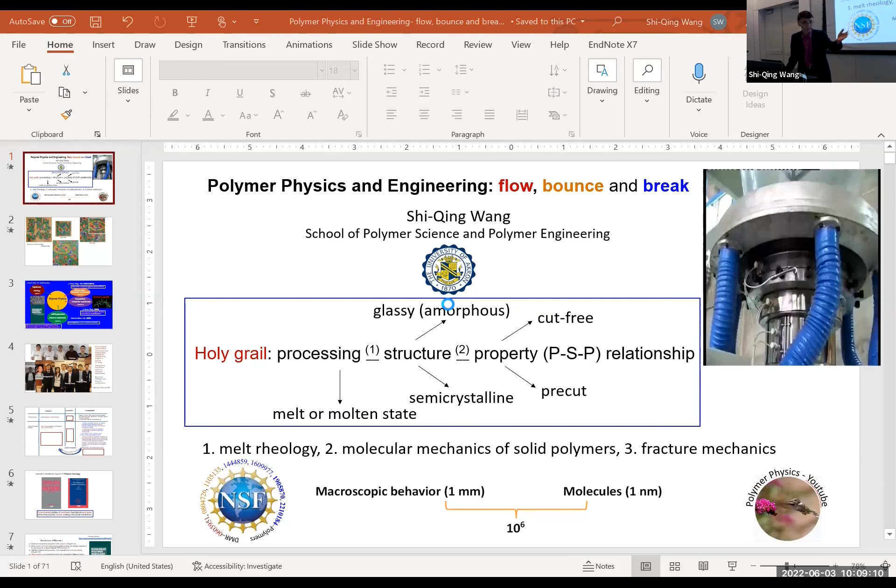Okay, now it works. So there's a melt state—you need to process it, and depending on how you cool it, depending on the material, it may be glassy or semi-crystalline. The processing can affect the structure, so if you can improve the structure, you may have a chance to develop better properties. But property is the most difficult because that's the effect you're seeing—you don't know what is the cause. You have to trace back in this inverse problem across six orders of magnitude.

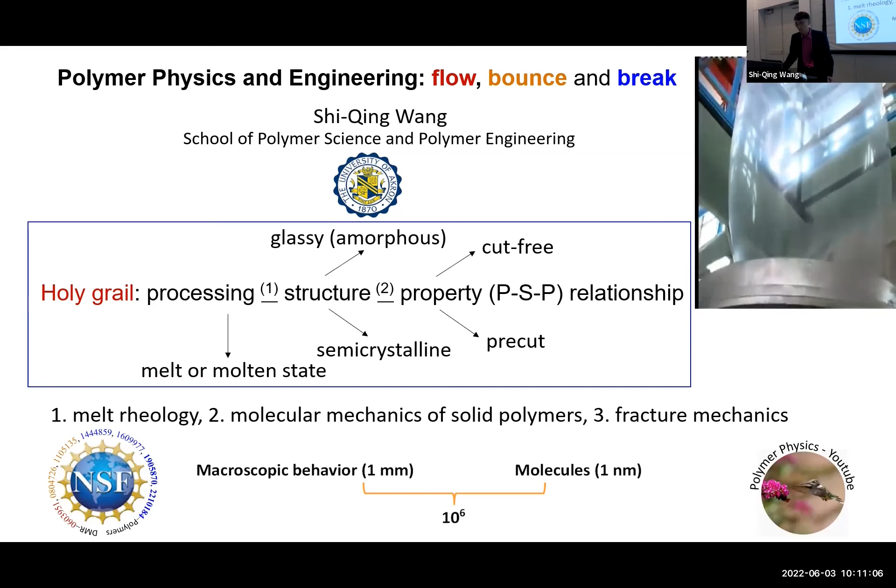I'm proud to tell you that we've been continuously supported by NSF for the last 18 years or so, and we're excited to embark on the last episode. So I'm sharing with you a story in three episodes. In any case, we do science like this.

We have a puzzle—you guys probably have it. It could consume you a whole afternoon and you won't be able to solve it, because when you put up the rest of the pieces, you find it's mismatched. It's not right. But my wife told me there is a solution, and the solution is different: these two butterflies are facing each other instead of facing the same way. What does this tell you? Don't be a frog looking into the sky—you have a very limited view, and that view can be entirely wrong.

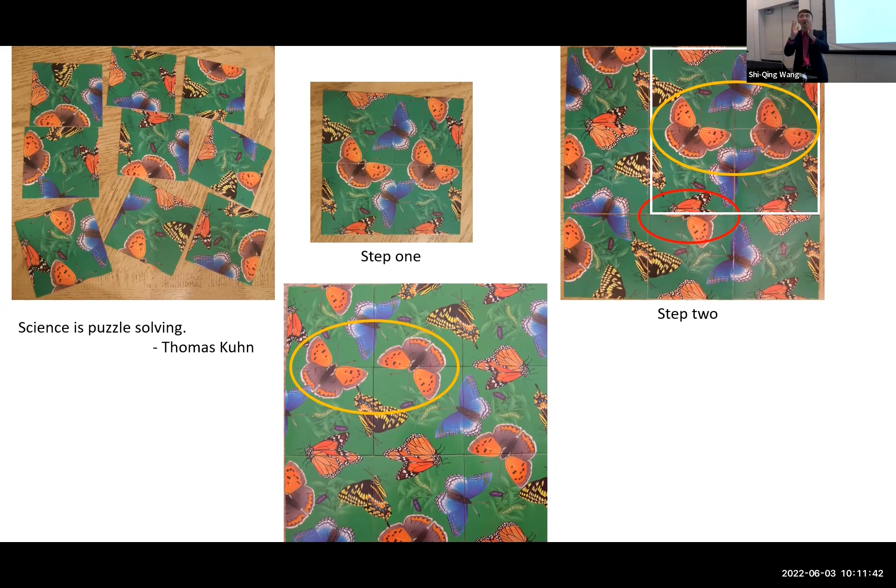So again, I probably only need to go through this slide and I can finish my talk already.

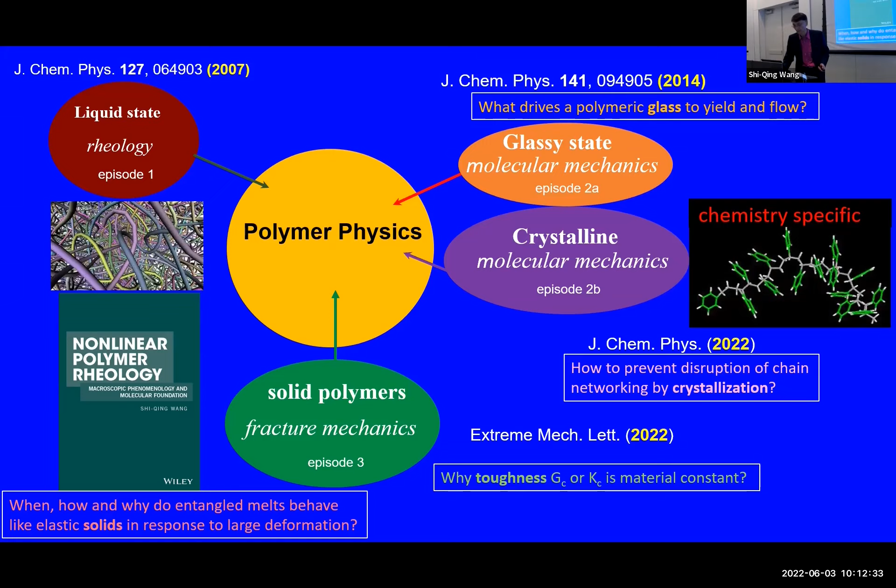Basically, in my world of polymer physics, it's about understanding melt rheology first—we wrote a book about it, about understanding why this thing behaves solid-like. Then when you cool down, there are questions about why glass can yield at all. And if it's semi-crystalline, there's the issue that you want to avoid crystallization destroying the chain entanglement—so how to do that? Lastly, moving to fracture mechanics, there's the issue of understanding the science of fracture mechanics, answering questions like why toughness is a constant. This involves three generations of students.

I'm sorry, I don't have a lot more time to describe this, everyone. So basically, there are three generations color-coded for each topic—this is a summary slide. If you look, our materials are of three types: there's rubber, there's thermoset, there's plastic.

So I'm going to say a little bit about the nonlinear region, how we think about glass breaking at the molecular level, and eventually answer the question of where fracture mechanics fits into this breaking.

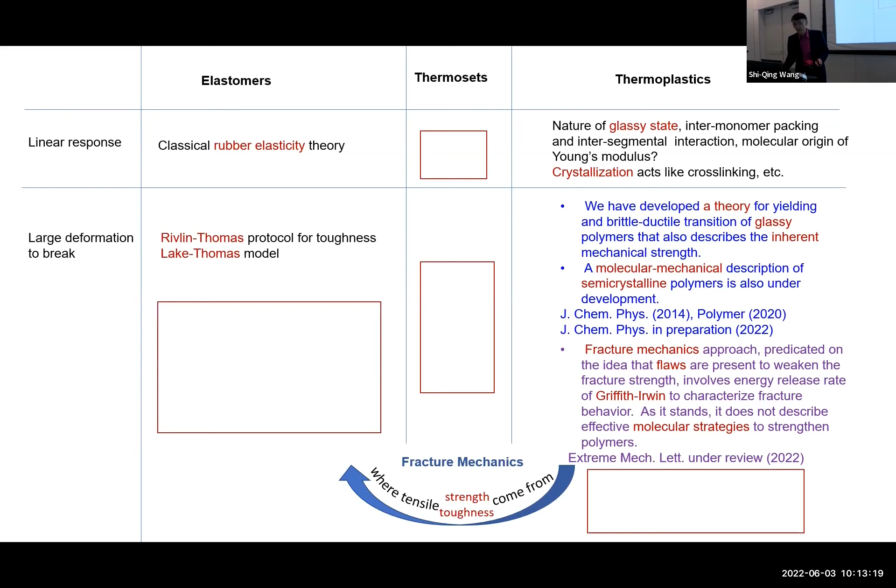And it turns out when you establish that basic notion through fracture mechanics, there are a lot of gaps to fill in each of these areas. So I will quickly run through, I need to be quick on each of the first two topics. The first is, after this book, these Bibles, we begin to learn from phenomenology that these liquids break apart, and they break apart in a non-uniform way.

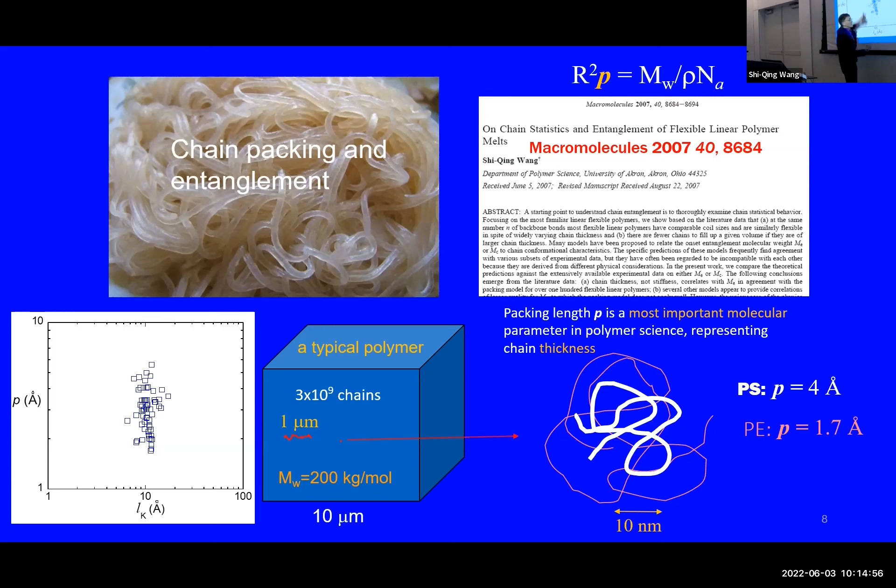I'm just going to remind people who forgot their polymer science, the key part about polymer for us is the fact polystyrene is very thick, polyethylene is very thin. That's depicted by something called packing length, which Professor Witten knows so well, and you popularized that concept. It was discovered in the 80s. This is the second most important parameter besides Kuhn length regarding polymer. I discovered by looking at dozens of polymers that Kuhn length is actually quite narrowly distributed, but packing length varies a great deal. It's an important parameter, though I may not have time to go into detail.

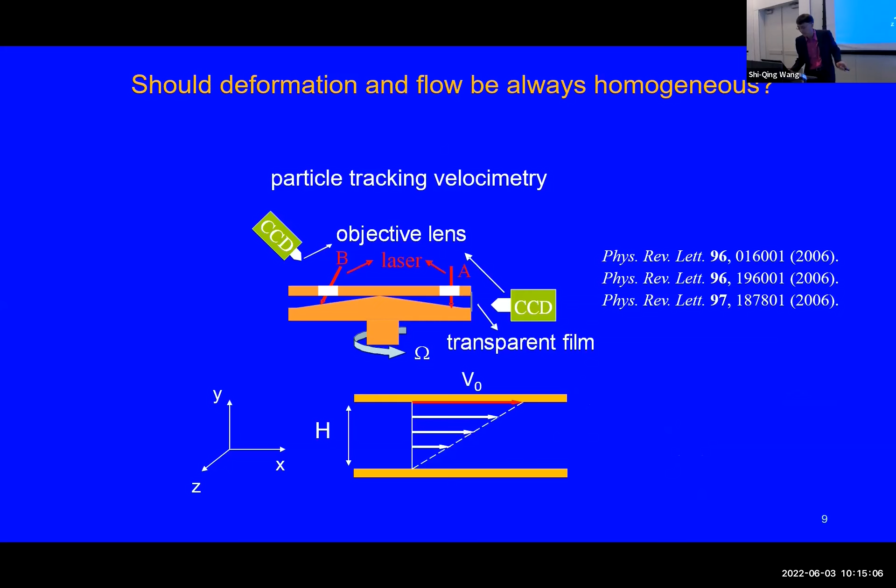So in any case, I'm just flashing through. Enjoy this as a story about the first episode where this kind of movie first caused us to drop our chins, realizing that the sample is actually breaking apart. This is about 1 millimeter, so it's breaking apart, in my language, having to do with something molecular happening.

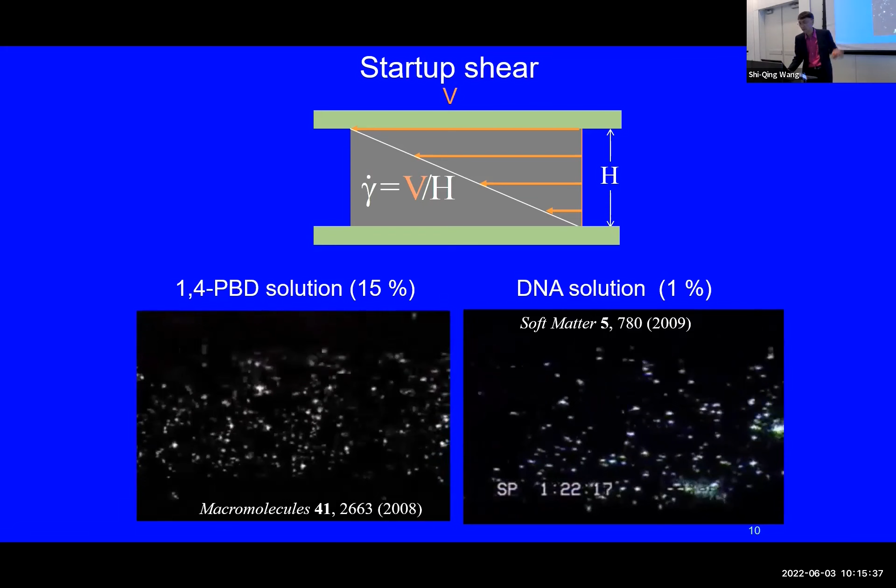So we, of course, worked over more than half a decade to figure out the science behind it. This is just an impression, and as I said, there is a lot of information about it.

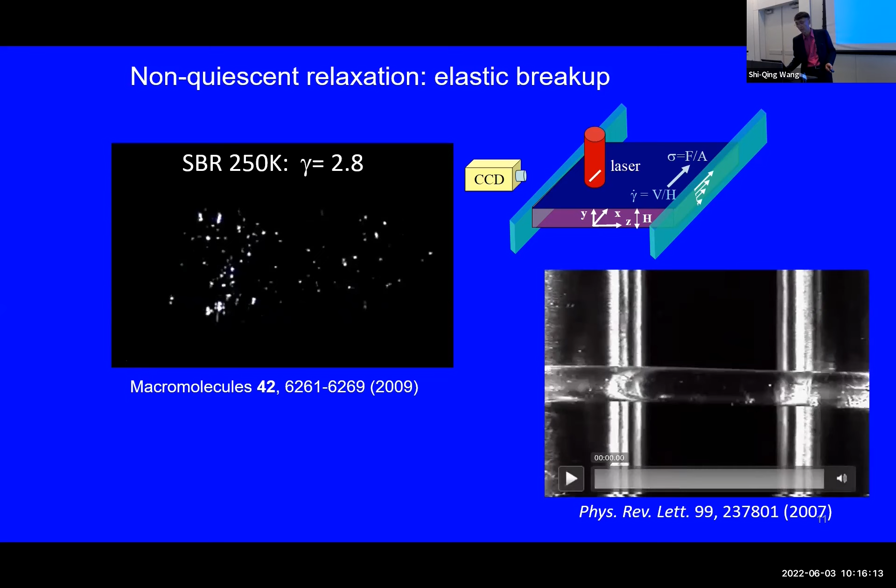So we predict that the same breaking will happen in extension. So you make a step stretching, you wait a little bit, and this filament breaks apart, elastically breaking apart. Let's save time and not wait for its breaking.

So basically there is the need to conceptualize this and rationalize it with a simple model that's way beyond what a tube model can capture. There is an issue of force balance. You cannot stretch the chain beyond a certain level. The chain will have so much tension in it, it will start to retract. That's the failure of your solid.

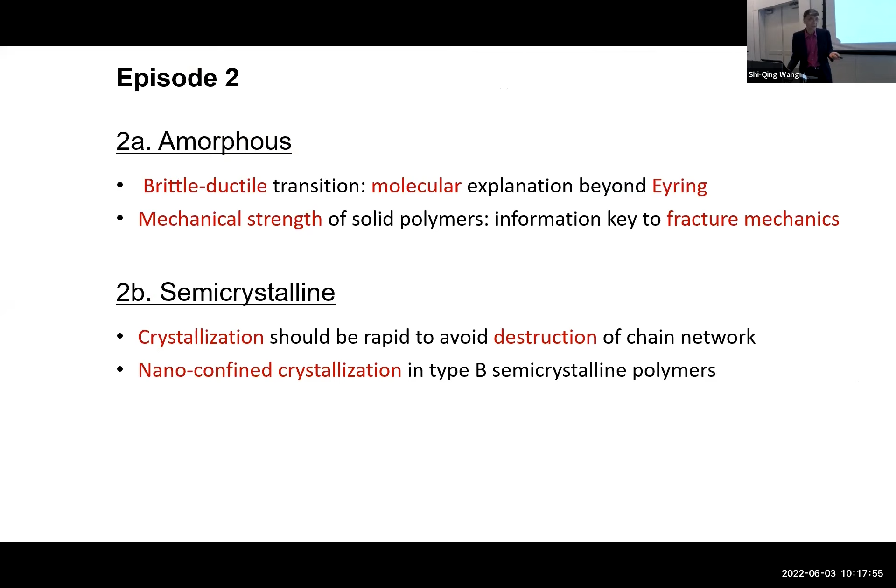So I'm going to go very quickly through this idea and work out what happens here. In this episode 2, of course, you have amorphous, that's easier. Then you may have semi-crystalline, which makes life even harder because the semi-crystalline could either be glassy or rubbery, depending on TG. So, a little bit of a boring review.

For melts, we handle the chemistry we can specify, and I just treat this as a network, not worrying about the specific chemistry. As we cool, what happens? Well, what happens is obvious - that network is still there. Of course, we haven't done anything, we just quenched it, or it just cooled down. But moreover, the way we did in rheology is we parameterize it.

All the specific details are in some phenomenological parameter like the friction, so that all polymer to us is like this picture of a rice noodle. All the chemistry can be dealt with.

In the glassy state, can we also parameterize it? The short answer is yes. In addition to treating the structure of this network, there is this additional structure, which I call the primary structure, because of vitrification. So you have to deal with the fact that they are sitting in a landscape. And then in polymer, you have how long it is, become entangled, and then elasticity arising from the fact you have sufficient entanglement.

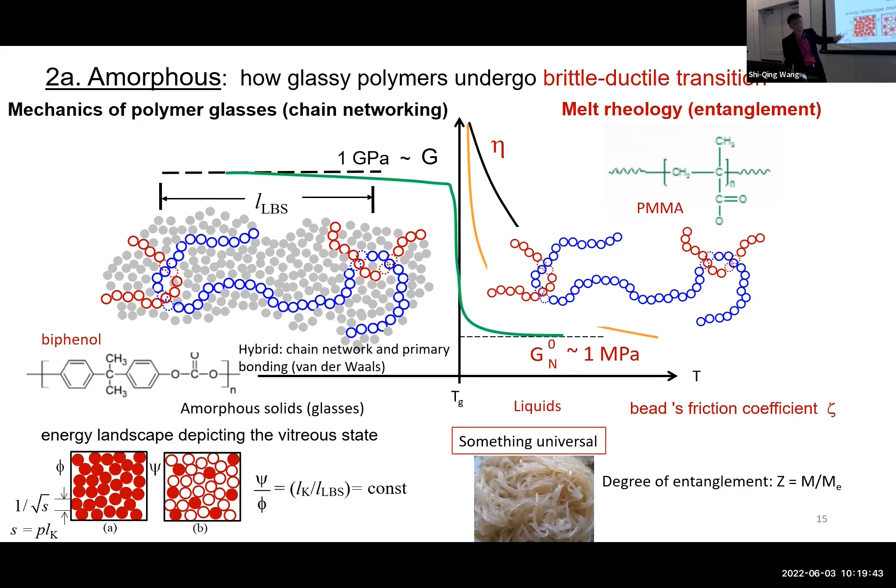In the polymer, in the glassy state, you deal with the same structural problem of how to depict the density of the network. It turns out that density is a fraction of what it is in the limit of fully extended chains. There are details I'm omitting about how to think about the structure. But let me continue by saying that the whole game of glassy polymer is about understanding the fact there is a brittle-ductile transition, and it's affected by 5 parameters I listed here. I will run out of time, so I will be very quick on what each parameter does in terms of whether it affects the primary structure or the chain structure.

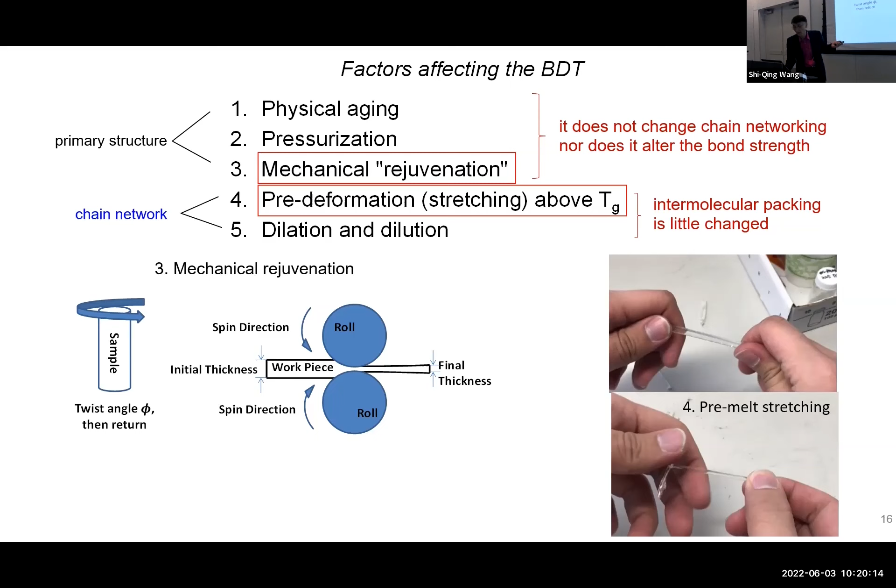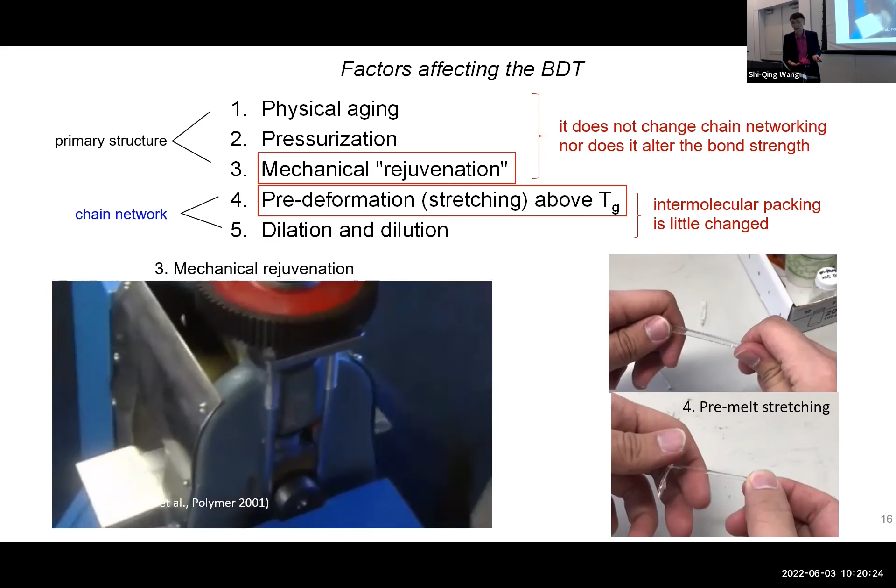One of the magician effects is the so-called rejuvenation. You pass your polymer through this cold two-roll mill, then this very brittle polymer turns ductile. So that's with no chemistry change, it turns ductile, right? That's called rejuvenation, one of the effects.

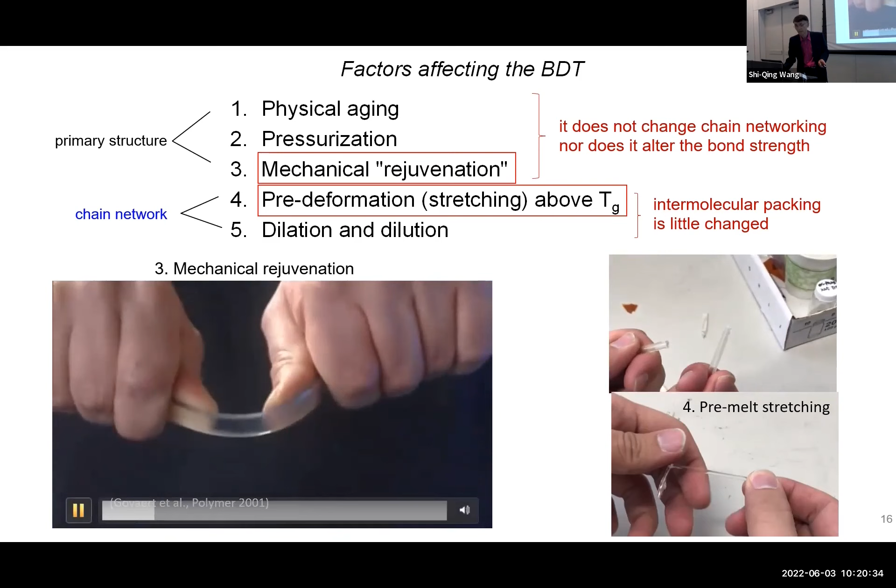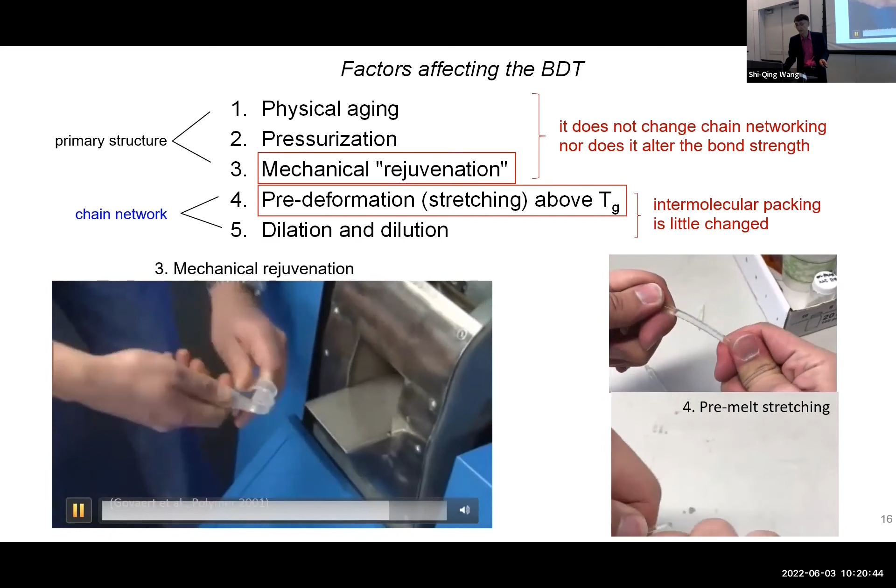Secondly, if you have this polystyrene, it's typically brittle, but after melt stretching, it turns completely ductile. So these are the effects. And for me, this allows me to introduce a concept which I kind of own, because it's a concept that's well known, supposedly.

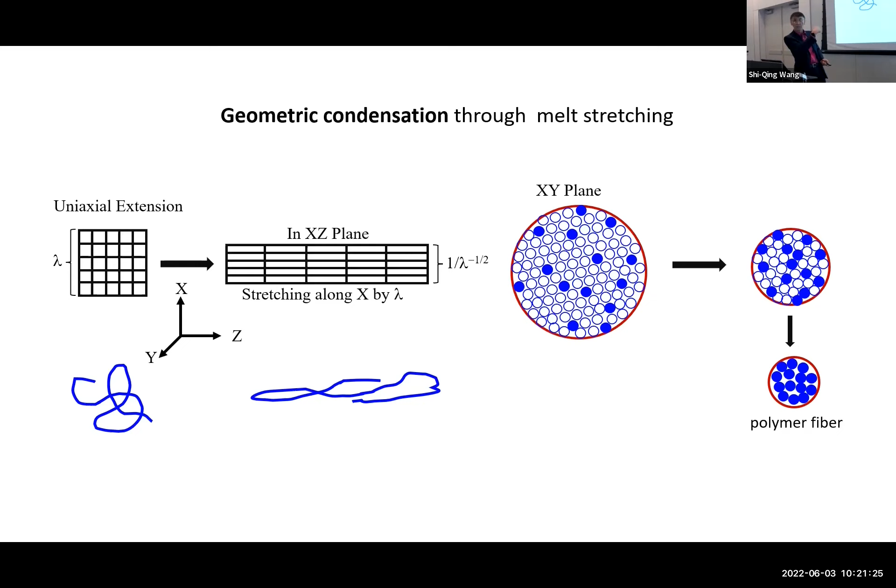Basically, there's geometric condensation of the chain network. So if I stretch in the Z direction, and then I look head-on, I find my load-bearing strands condense. It's the same cross-section area that's shrinking, but I still have the same number of load-bearing strands. And in fact, the limit of that is fiber. This is why fiber is strong, because every area is effectively bearing the load. In other words, prior to that, this network is very sparse, very loose.

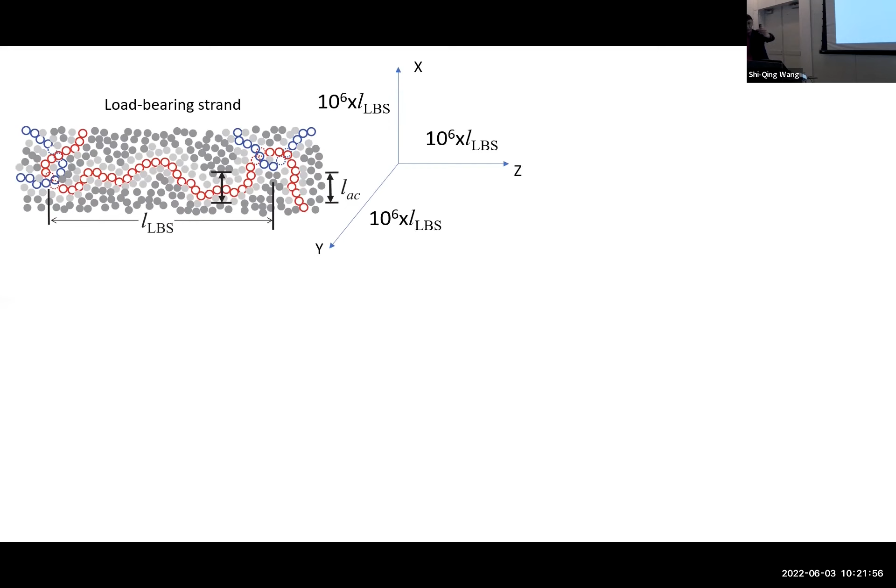So the picture for us to understand why some glassy polymer can be ductile is these load-bearing strands as my stretch is global. Keep in mind, my sample will involve millions of such units. But these load-bearing strands, as I stretch from one end to the other end, millions away, they will start to get displaced. When they get displaced, the neighbor will eventually start to move around. So you can create some activation zones, if you like, and that grows as you stretch more and more.

So the brittle-ductile transition, in my mind, was a Goldilocks temperature above which the network survives and activates, below which the network falls apart, and therefore you cannot achieve activation. There's no mobility available for you to match with the imposed rate. Therefore, it breaks apart. So this allows us to understand why melt stretching makes polystyrene ductile, something known for 50 years, because you bring the load-bearing chains closer, so your activation zone only needs to be smaller to achieve activation.

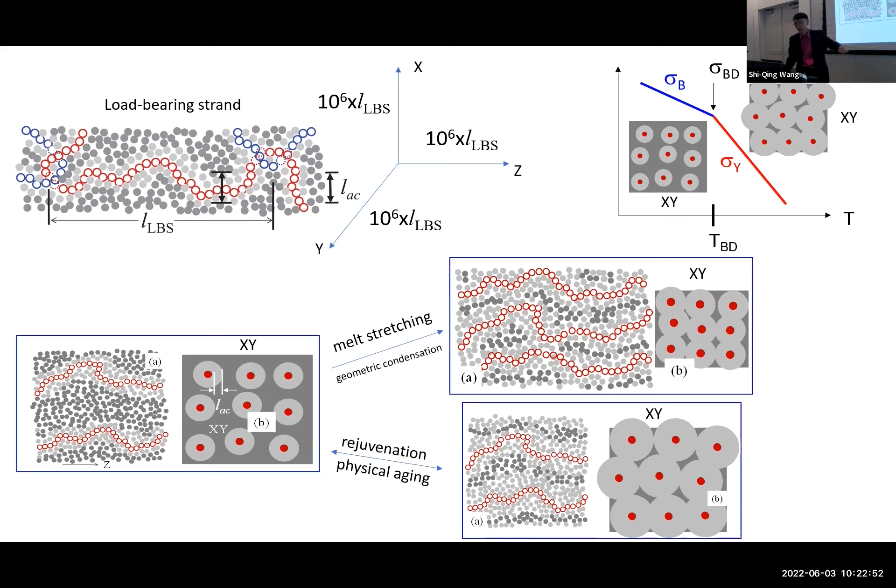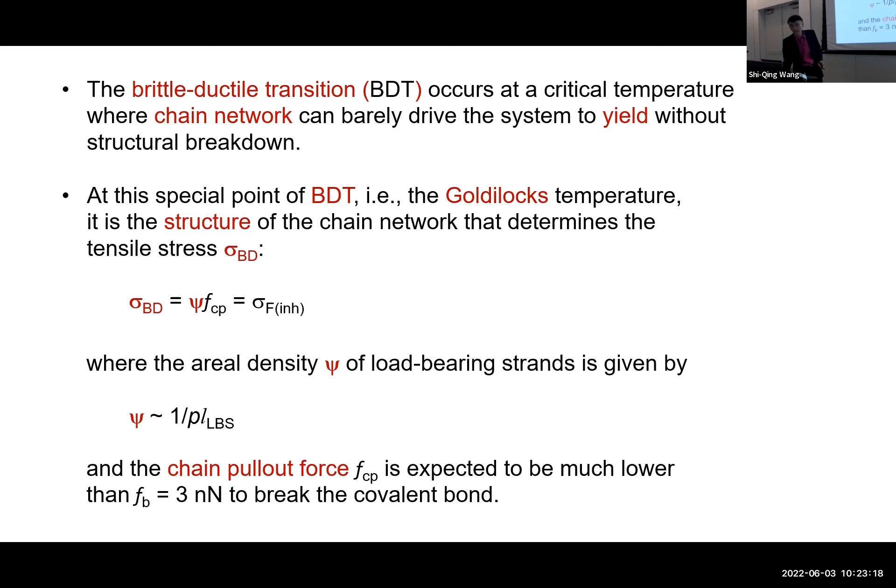And you can understand physical aging and rejuvenation in the same manner, in terms of how dormant the system is. So we can understand it. If you allow me to say, from this, I can even imagine how to calculate the stress. It will be just the load-bearing chains and the area density of load-bearing chains. And this gives me a notion of what would be the theoretical strength of my polymer, provided by these two parameters. So if you fit this model to the experimental data, you find it...

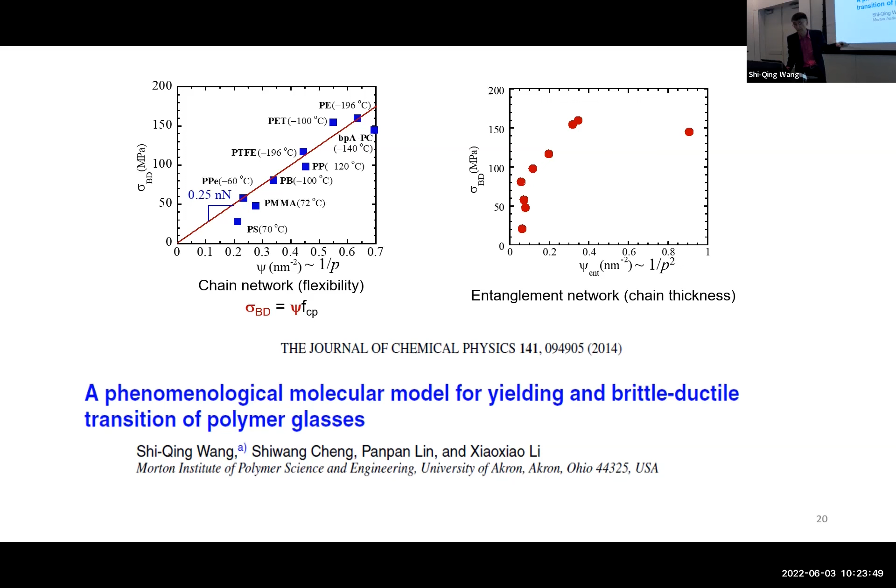...offers some support of this idea, that the strength of your material is dictated by the tension available in the chain before the network falls apart. And the way it falls apart mostly is through chain pull-out. So in any case, we have some idea about how much strength there is in a polymer.

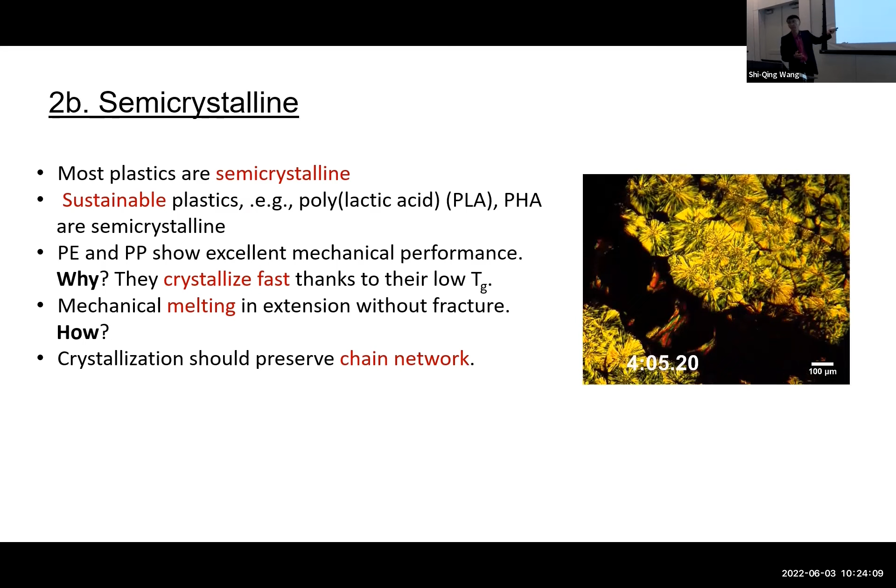So I will quickly go through the semi-crystalline polymer. The story there is very simple. We are lucky to have something like polyethylene and polypropylene. They have such good properties because they crystallize so fast. Once they crystallize so fast, they can preserve the chain network. That's my conclusion on this topic.

So in this world of sustainability, we have biopolymers or biodegradable polymers that's just poorly brittle, such as PLA. It's just horrible.

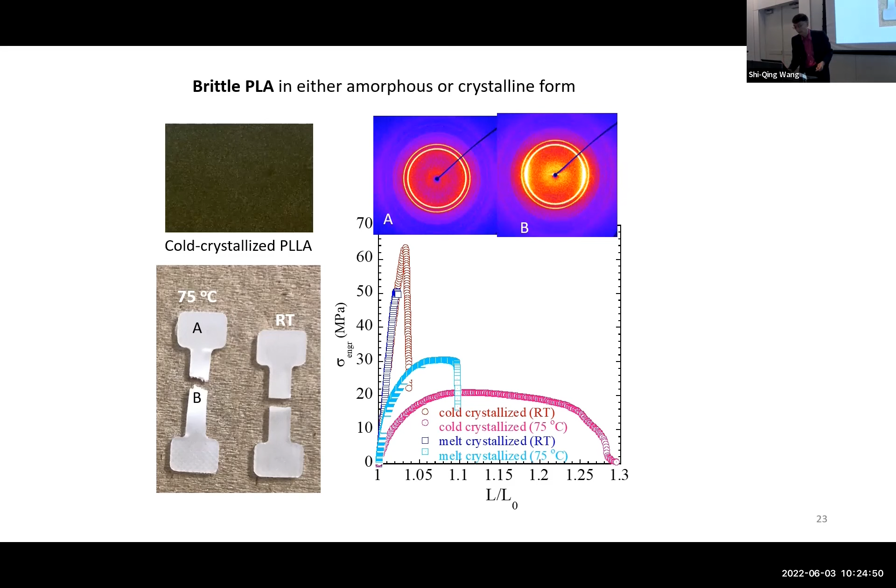But is there a way to make it better? So I have some samples. Either you can make it crystalline or not crystalline, but in both cases, they are brittle like crazy. Both are brittle, either glassy or semi, either amorphous or semi-crystalline.

So I play the game of rheology. I stretch this polymer in the melt state, hoping that I stretch it still in the elastic limit, so strands are all lined up to induce crystallization at each mesh size.

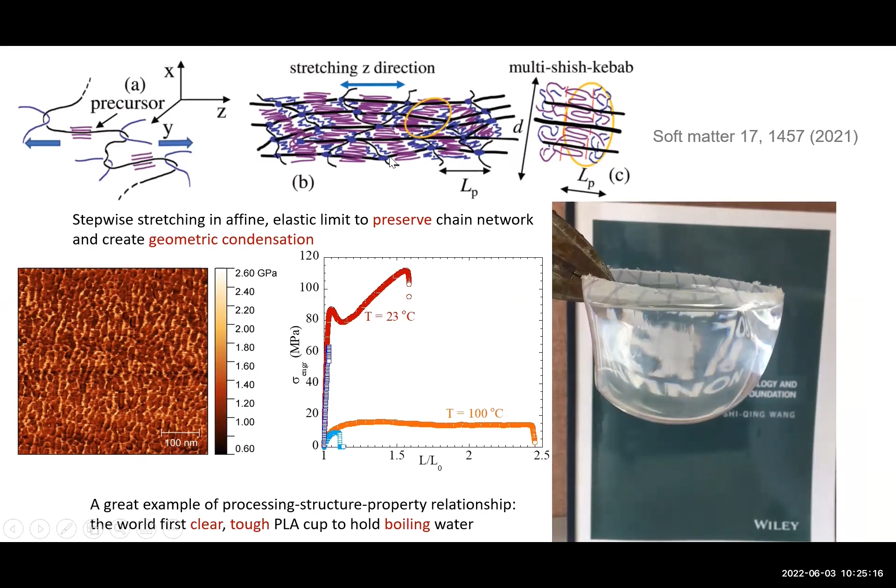But I have something else, so that I have enough nucleation of crystals, and each crystal is confined to the mesh size level because there's only that much available material.

So you have a nano-confined crystallizing PLA that's tough, transparent, and heat resistant. That's boiling water. So that's the world's first PLA cup of such property.

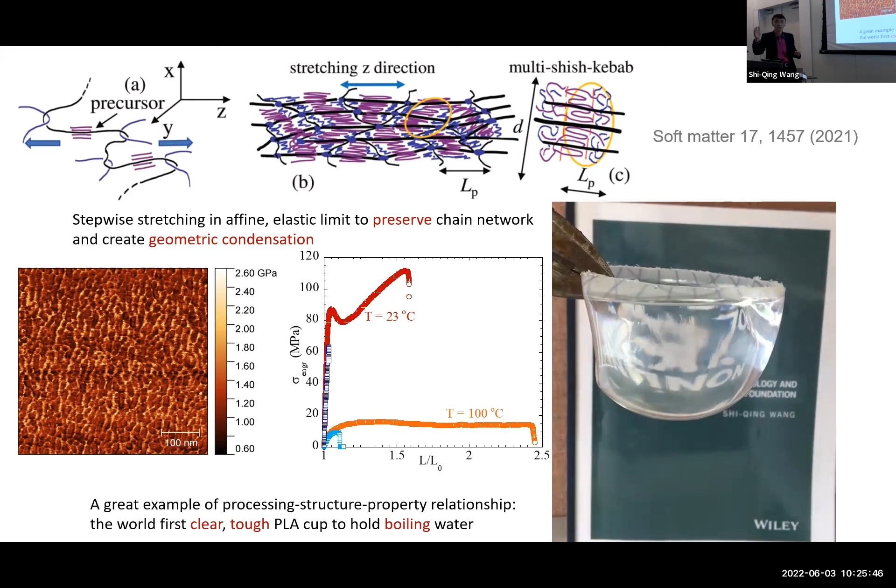So this is a great example of PSP, meaning processing leads to better structure leads to incredibly better property, because we successfully inverted this problem. We know what structure is required for the property.

So with that, I think I'm hitting the mid mark. I'm perfectly on time. So this is the introduction, all that have been published. It may take time for it to catch on, but I move on because I cannot wait.

The knowledge, the understanding, the experience we have had in the first two episodes really allowed us to ask some fresh questions for this fracture mechanics. It's a vast subject, fracture mechanics. We never touched that subject. It's something we shy away from, until we see that it seems like we can make a contribution there.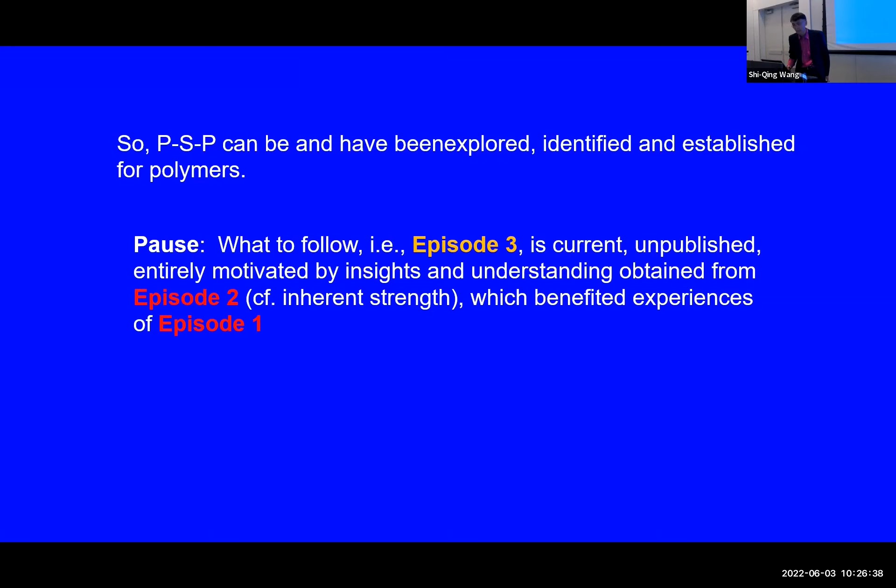And this third episode is what I should spend my bulk time, the next 20 minutes maybe or so on. But it's all summarized here already.

So I think for the first time, we were identifying the science behind it. In the sense, we are going to address the question of, gee, where does fracture mechanics come in? Why it works or not for polymers? Therefore, we are able to answer the question of whether polymers are flaw tolerant or not. And more importantly, why toughness is a constant, or what determines its magnitude. So this is a topic.

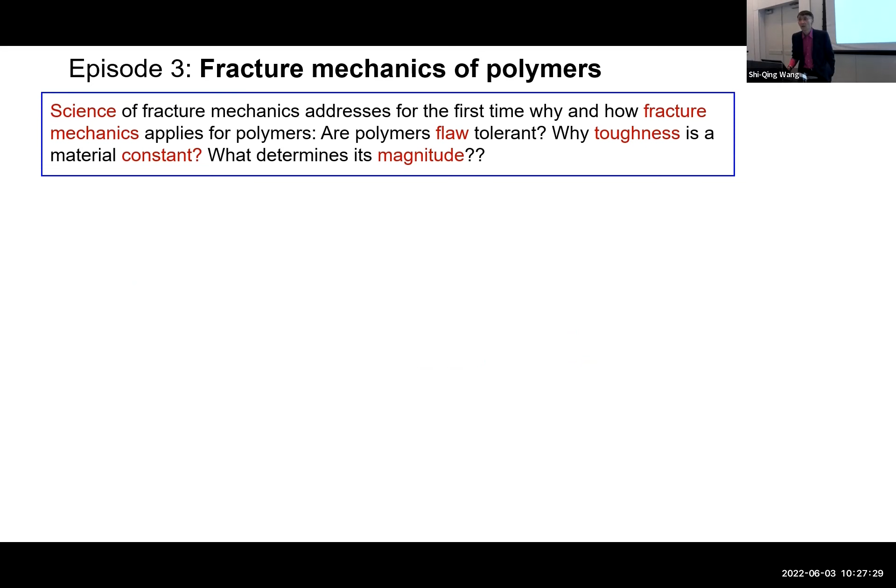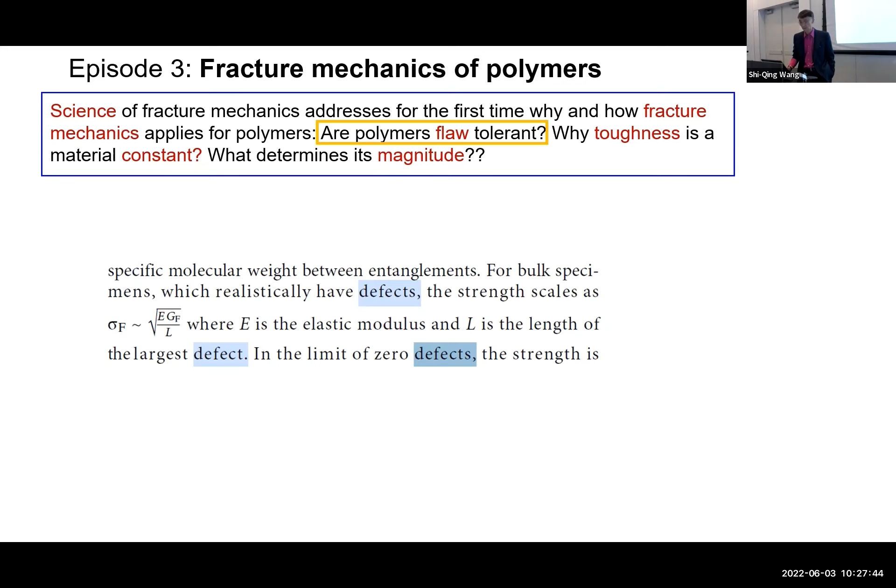I tell you this topic is very contemporary, because this is a paper - I'm not going to disclose it - this is a paper of last year, still telling us that polymer is flaw intolerant, that the breaking of polymer is because there are flaws. Okay, this is last year, so it's contemporary.

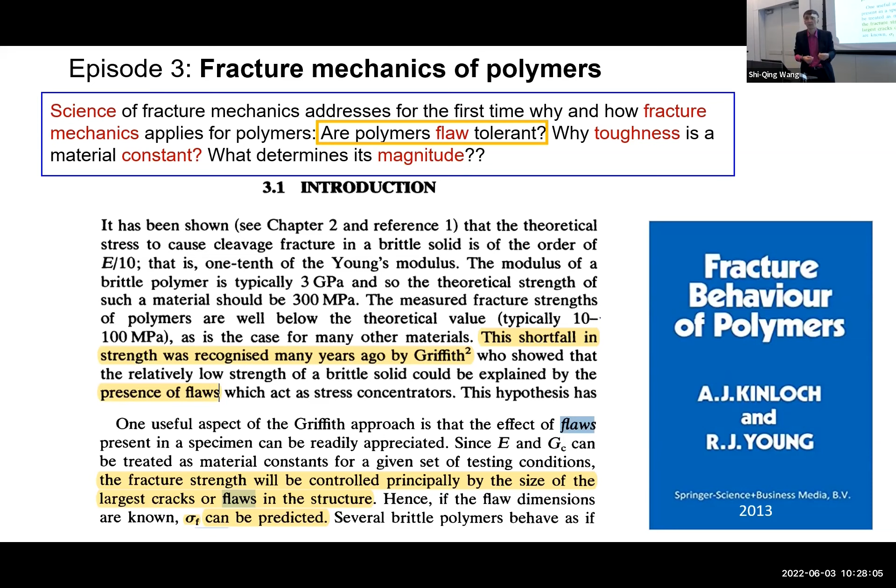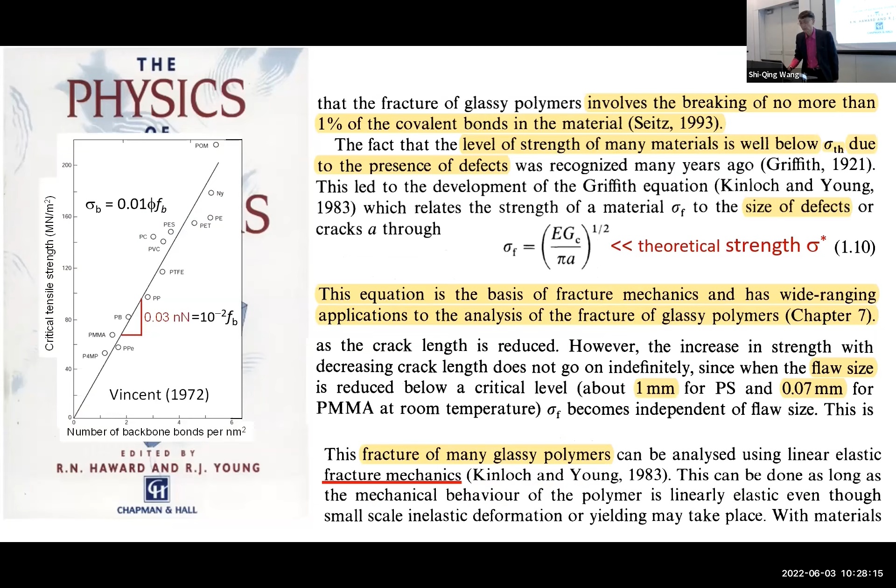And is this so? Is the question. So if you open textbooks, they will blame - look, I highlighted - they will blame all this on just flaws. Polystyrene breaks, PMMA breaks, is because they are flaws. Is that so? And so you can flip another page, it says the same. Basically, there are flaws as we know it. And there was some confusion about what to do with it.

So let me just review for you fracture mechanics using 2 minutes of your time. This is fracture mechanics. It started with people dealing with window glass. It's very brittle, and it breaks at 200 megapascals, and that's two orders of magnitude smaller than the so-called theoretical strength of 7 gigapascals.

Man, how do I deal with that problem? So people figured out, since Inglis, that there must be some defects in there. And if you follow that logic, your window glass must have flaws on the order of 1 millimeter.

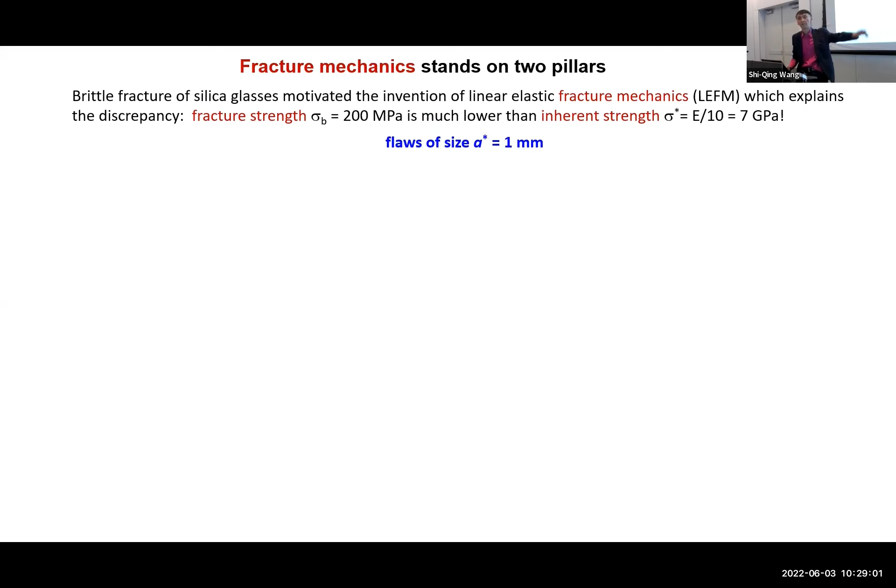Okay, so here's fracture mechanics. The next minute is the whole 9 yards of fracture mechanics. When Inglis first did a theoretical calculation, dug a hole in this plate, he found the stress would diverge. Okay, so the stress would diverge. Lord, what happened? Yeah, the stress would diverge if this aspect ratio becomes infinitely large.

And people were very much annoyed by this, because in that limit, an infinitely small load will give you fracture by definition. Very annoying, and that didn't happen. So this argument must be abandoned for the moment, let's say.

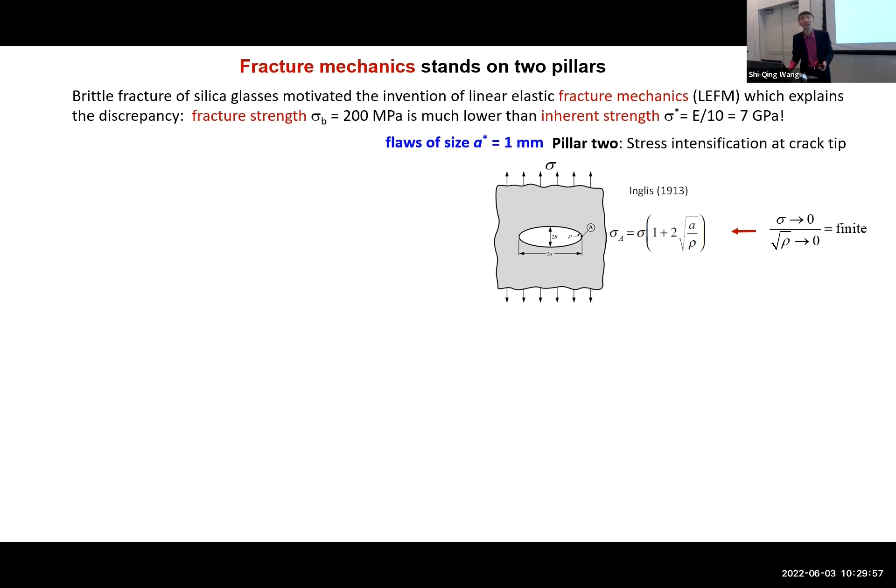So that's where Griffith moved on. Griffith, in 1921, many years later, used this solution and said, let's consider something different. Take a piece, unload, without a cut, without anything, intentional cut. You draw it - in the elastic limit, you store energy, of course.

And then you make a cut. What happens? You must release energy, because that cut made sure you no longer store as much energy anymore. So the difference is what you release, the energy. That's this term - you can do a scaling argument to find out what it should be.

Now, his question was to ask, once you have this cut, can it grow? He says, let me just have a little more cut - I will release a little more energy. And let me compare that energy with what's required, which is surface tension, the energy required to create new surface. He says, oh, if this is greater than gamma, it must fracture.

So you no longer need to shy away from fracture mechanics. That's all of linear elastic fracture mechanics, that's all there is. And with that, it leads to the famous law - you all know that's Griffith's.

But that's not the whole point. Remember, we call this pillar 1. There's still pillar 2. Westergaard further established that you can calculate how the stress changes as you move away from the tip, not just the solution at the tip. And he found it's going to diverge - you meet the same problem, the stress is going to diverge. It's nasty, we don't know what to do with it.

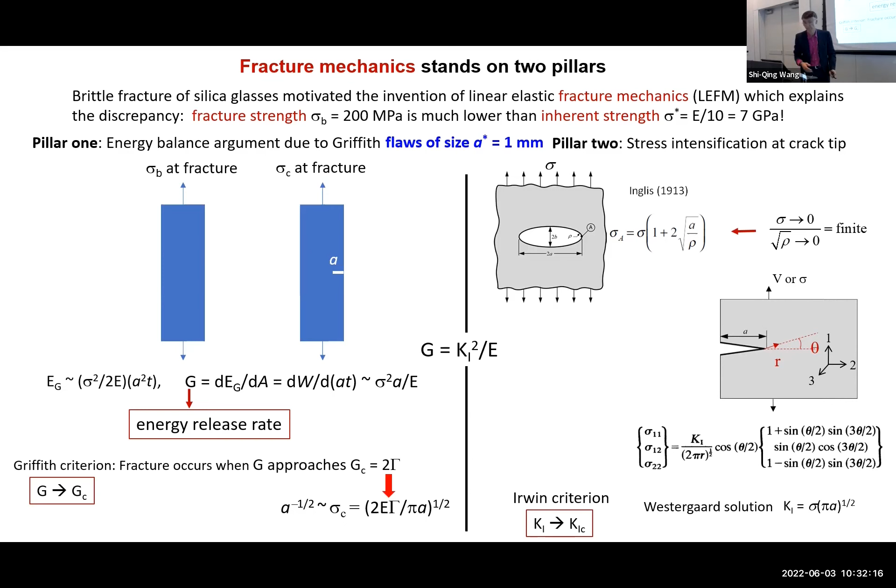And this is the first time people learned about it from glass and metals and applied it to polymers. These are two papers - the first two papers are on elastomer on the left and plastic on the right.

What happens? Well, bad news happened. Bad news, which alarmed me and made me crazy a year ago when I learned this. Bad news: what you learn is that this Gc, the energy thing, is thousands of times larger than surface tension, instead of equal. Only when they're equal does this energy argument work. It says I need to pay this much, but it turns out I give 10 times, 1,000 times more before it would break.

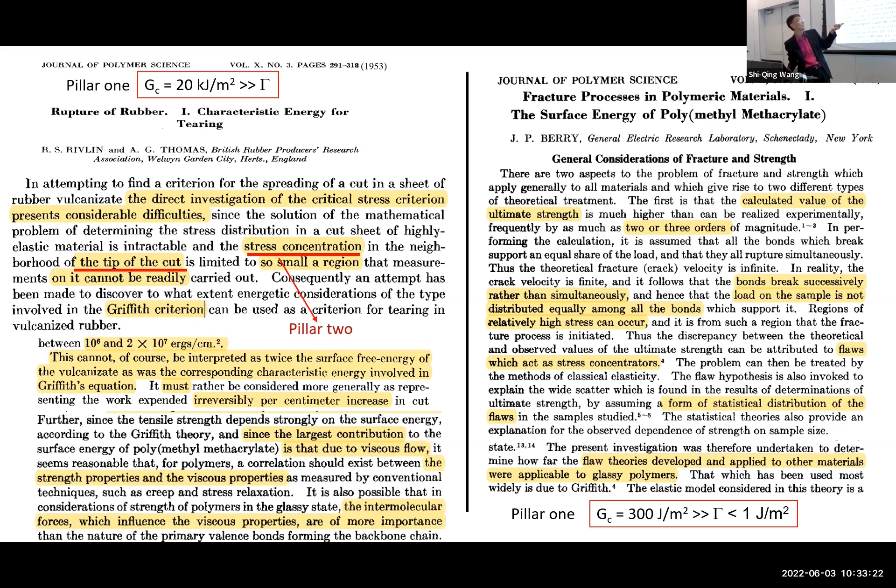So this argument is no longer effective, at least on the surface. Yet it still works - the Gc is still constant. In other words, depending on different cuts, I still have the load being inversely proportional to the square root of a. So that's where the mystery is, and we are in the middle of solving that mystery. Basically, you find it doesn't matter - for elastomers or for plastics, both cases are off by two orders of magnitude larger.

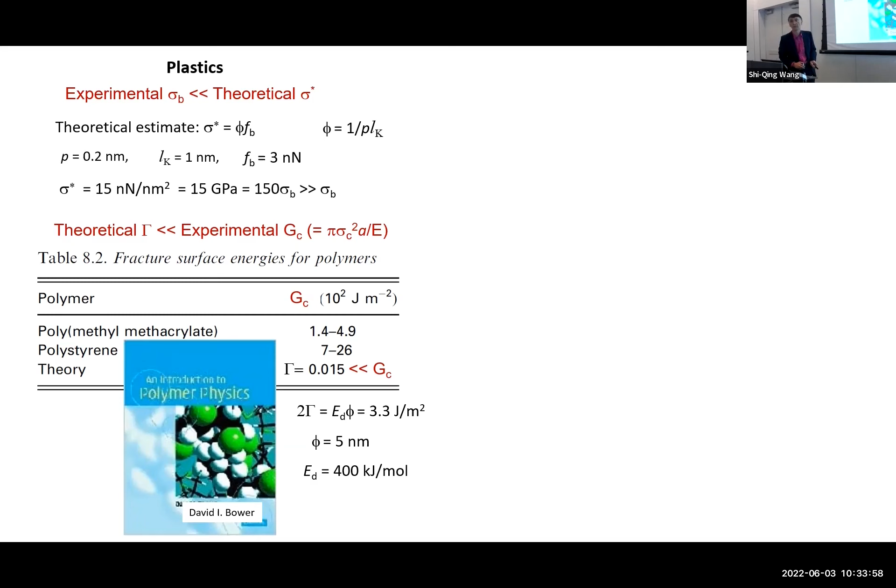Here's the textbook - they recognize that. This textbook says, oh, by the way, I know the Gc is much larger than gamma. This is the fact, and in fact this difficulty was just ignored. Okay, I still need to preserve it. So what happens? You must have just plenty of plastic dissipation going on that you didn't take into account. In any case, the origin of this is that the theoretical strength being much larger than experimental strength, and that carries to elastomers as well.

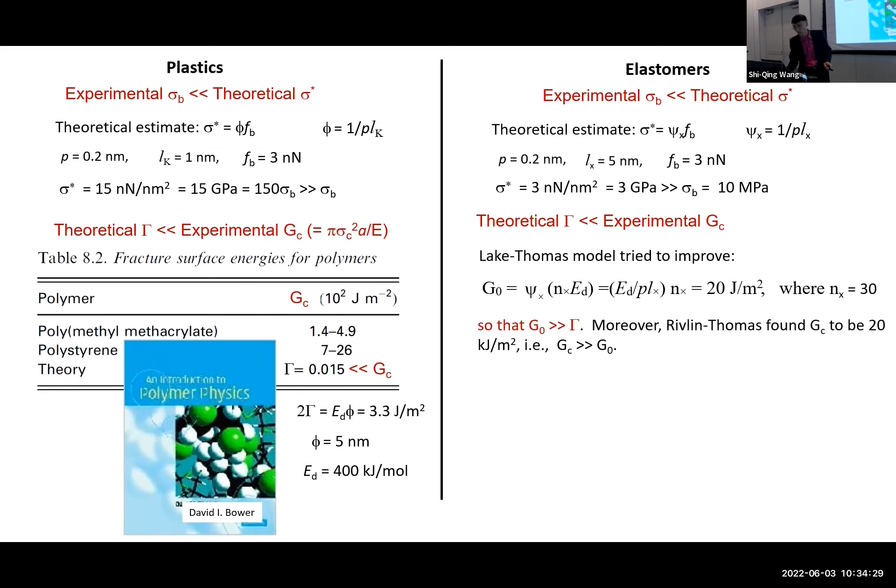Theoretical strength being much larger than experimental strength - I'm going to review this part as well. And then people find the same thing, that the toughness, called Gc, is much greater than surface tension. So this becomes a paradox. On the top, the theory is bigger than experiment. On the bottom, for toughness, it's the reverse. So the textbook even calls this a paradox in this book.

It turns out, to say the least, your theoretical estimate is wrong. So our episode 2 enabled us to answer that this type of guidance is wrong. The theoretical strength of your polymer is only 100 megapascals, not gigapascals. Same is true for the rubber. The theoretical estimate is wrong because not all the bonds bear the load at the same time and break at the same time - it does it in a stepwise manner, in such a way that explains why such discrepancy shouldn't exist.

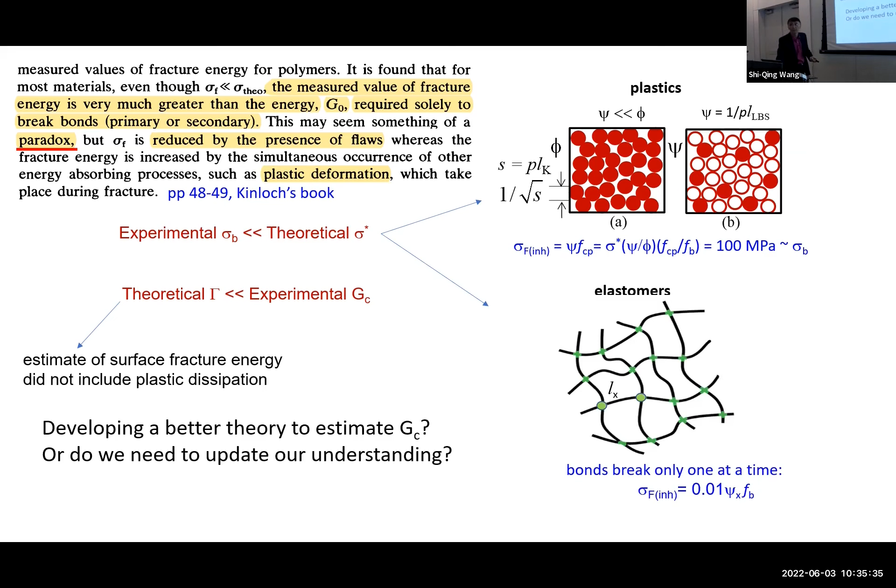What about this discrepancy? Here's the problem now. This discrepancy means - should I develop a theory to take into account plastic effects? Or should I develop a better theory that does something better? Or do we need to completely update our understanding on this topic? So I pose this question to you - this is almost the core question of the whole thing. You observed that the energy you have to pay is much higher than what's needed to just create the surface. Therefore, to me, this energy argument is no longer valid, meaning it doesn't give me insight anymore.

Gamma does not prescribe the magnitude. But then why is this thing still constant? So that this is true, actually. And what determines the magnitude of this? This is the last question of this.

I want to indicate fracture mechanics is a tremendous success because they identified what is GC. They could somehow care less, or in fact are unable to answer why GC is constant. When the energy argument doesn't work, you cannot answer why GC is constant. And you certainly cannot answer why it has the magnitude it does.

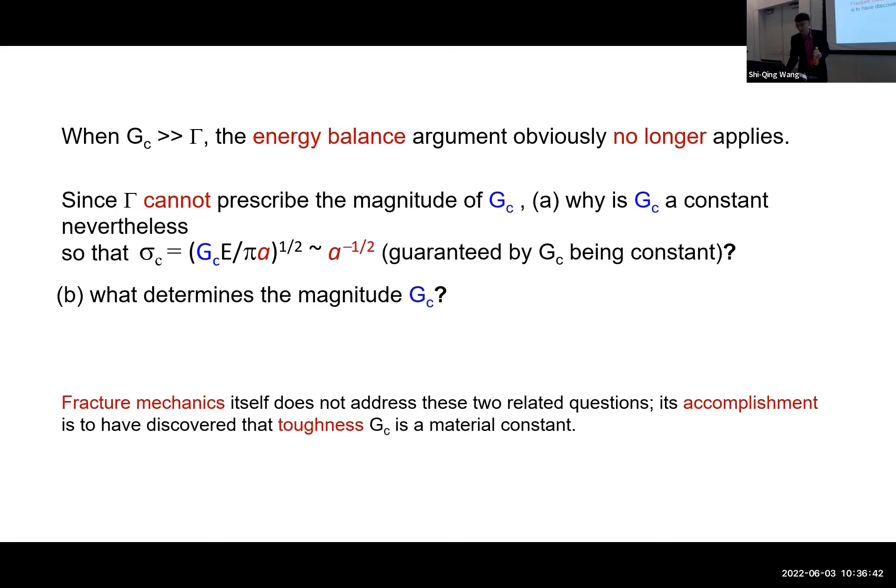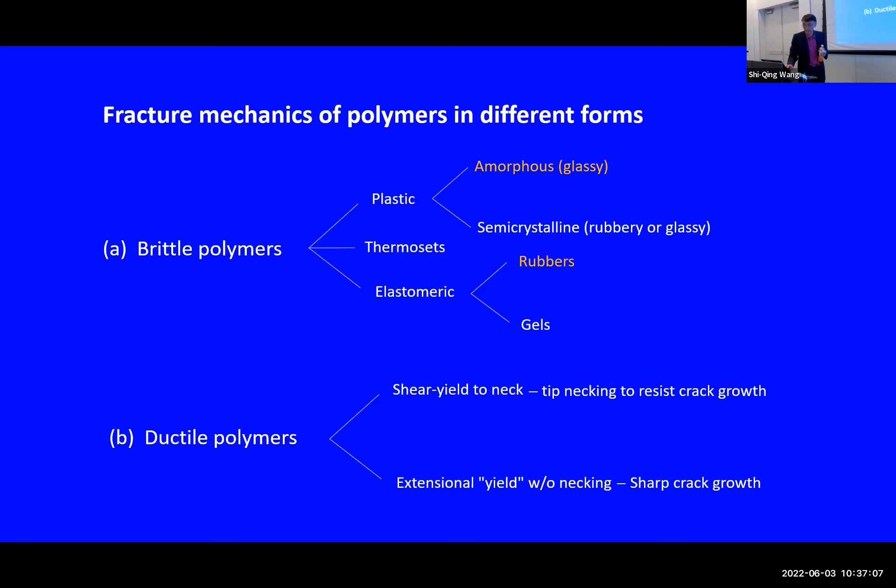So we're just starting to scratch the surface of this. We just discovered that there could be issues here to be looked at. So this is a map for us. Today I'm just going to give you two examples, amorphous glass versus an elastomer, in terms of the fracture behavior in light of all these questions that I raised. So the rest, relax, it's just data now. Motivation is done. It's data.

We're going to try to read the stress at the tip, because I'm a believer that fracture occurs because the stress at the tip exceeded the inherent strength. In other words, it's a stress argument rather than an energy argument per se. So let's see how far it goes with this.

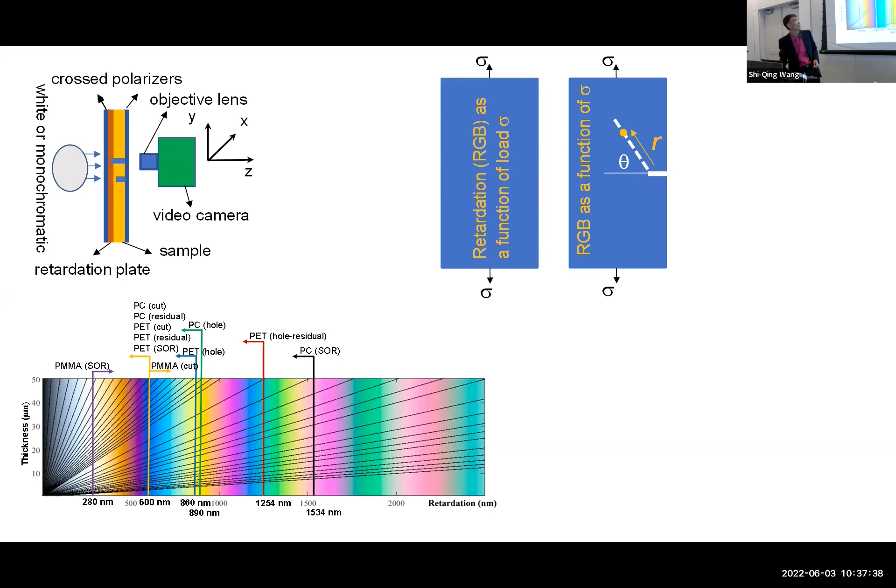So you get one with a cut, one without a cut, and you do birefringence, which is a good way to have some indication of the correlation. See, this is a white light with crossed polarizers. So I have two different samples, the other one with a cut already. This shows that I can at least keep track of the molecular deformation taking place.

In the case of uncut, it correlates with the stress that occurs. In the case of ductile material, you see PET at the right figure, it doesn't go to brittle failure, it necks and yields.

And better yet, if you have very birefringent materials, you don't use white light, you use monochromatic light, and just count the number of fringes as it turns black and white, black and white. For white light, you use this Michel-Levy chart to guide you about how the birefringence builds up.

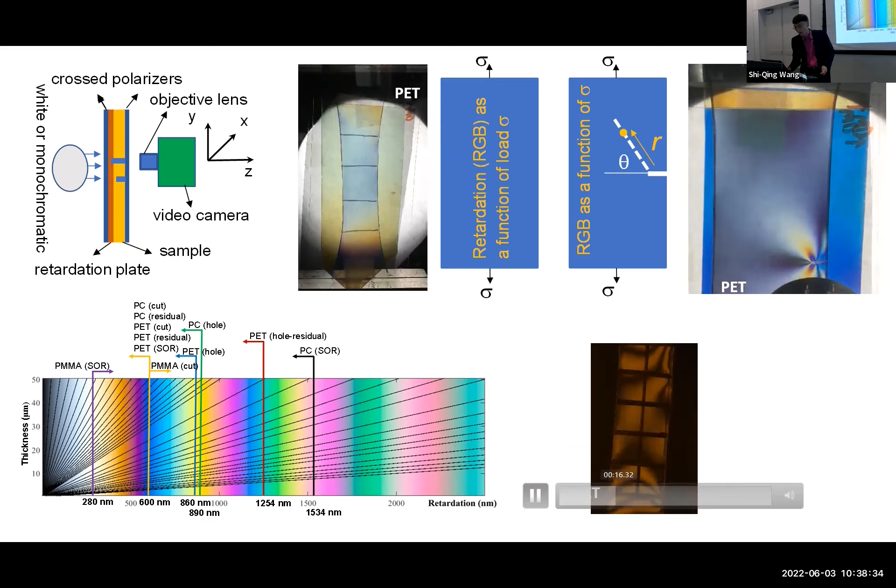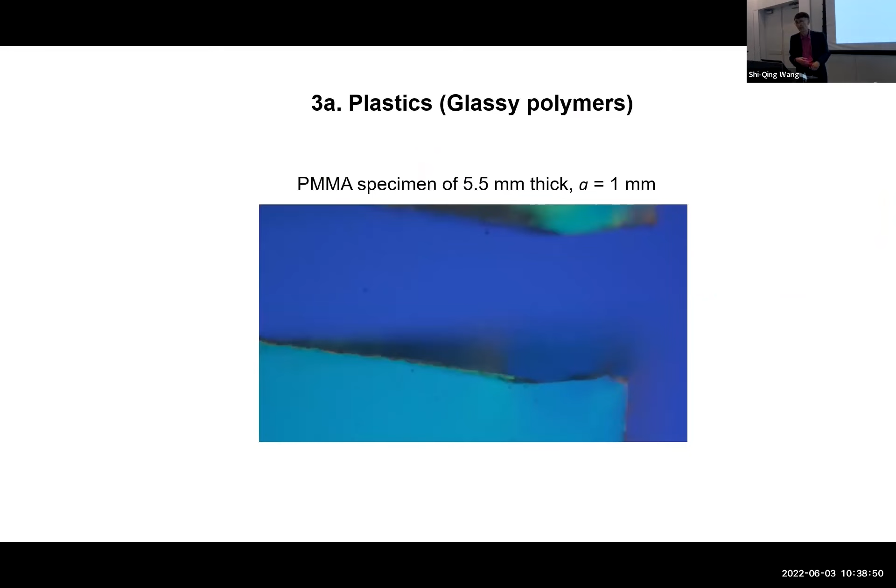So here's our first result: PMMA with a cut, with white light. As the color changes, it shows the birefringence progressing. This is the raw data, and you can analyze it. My student tried to take a still picture of each and blow it up.

The 4K video helps because we need to resolve what happens at the tip. You can translate that color into a distance-from-the-tip kind of information. What do you find? The stress, or birefringence, builds up, but then plateaus.

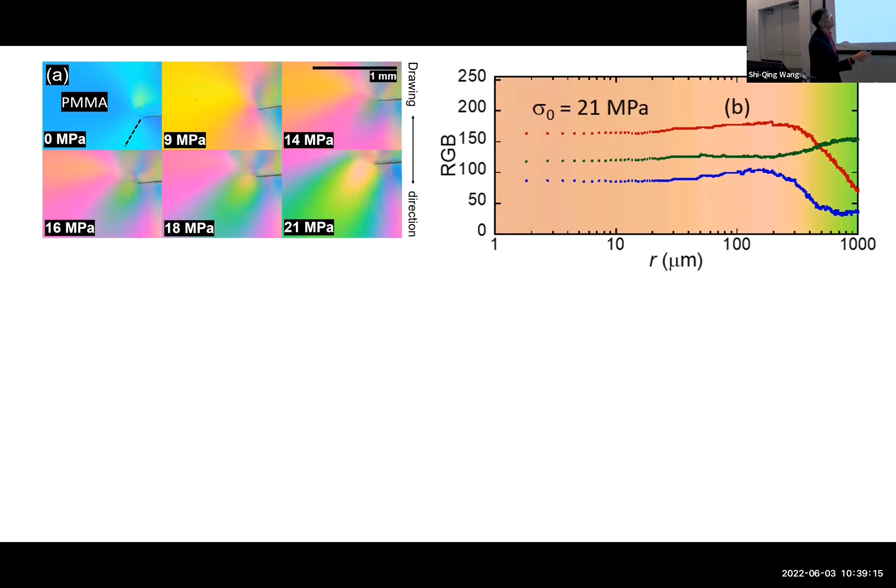You can quantify this information. The stress builds up, because I plotted it as square root of 1 over R, with R toward the tip this way. It builds and then levels off. It levels off—I pray to God, meaning indeed we probably did—at a scale that we can resolve: 50 microns, 100 microns. Let me just inject this information.

You do exactly the same for window glass. This cutoff will be 1 nanometer—impossible to resolve. But for polymer, it was resolvable. And quite interesting, it's very different from traditional fracture mechanics.

The tip stress builds as I load more and more, linearly. Tip stress grows with the loading parameter, the so-called stress intensity factor, linearly. If it's linear, that slope—by dimensional analysis—involves a length scale. The tip stress builds up linearly; this is nothing but the normalized loading parameter involving the cut size. If you have different cut sizes, you can collapse all the data there.

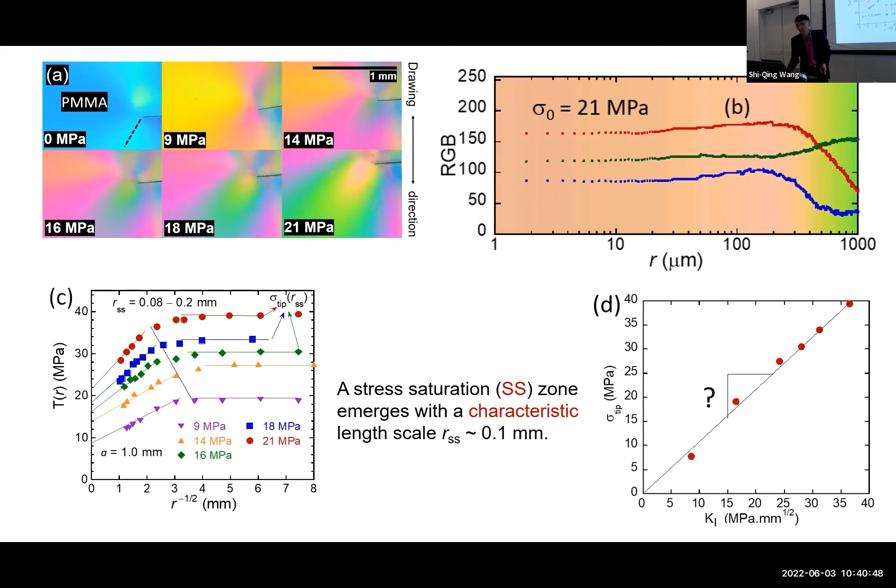In more detail, you can do a different cut length with the same loading parameter. What happens is this linearity holds all the way to the point of breaking. As I said, this linearity means a length scale pops out—it just pops out—and that length scale is about a fraction of a millimeter, a tenth of a millimeter.

Not only that, this relationship works all the way to the point of fracture. Oh my God, that allows me to say a great deal. I carry this relationship all the way to the fracture, therefore all the way to Kc, the toughness. I realize that is related to the tip stress reaching some limiting value, which we identify as the inherent strength. So all of a sudden, Kc not only has this operational definition of the loading and cut size—independently, I have Kc related to the inherent strength of your material and a characteristic length scale.

I answered two questions already: why K is a constant, Kc is constant? Because inherent strength, of course, is a constant. The only thing left is why you have this characteristic length scale that's constant. Separately, this expression already said what is the magnitude: it's sigma times root p.

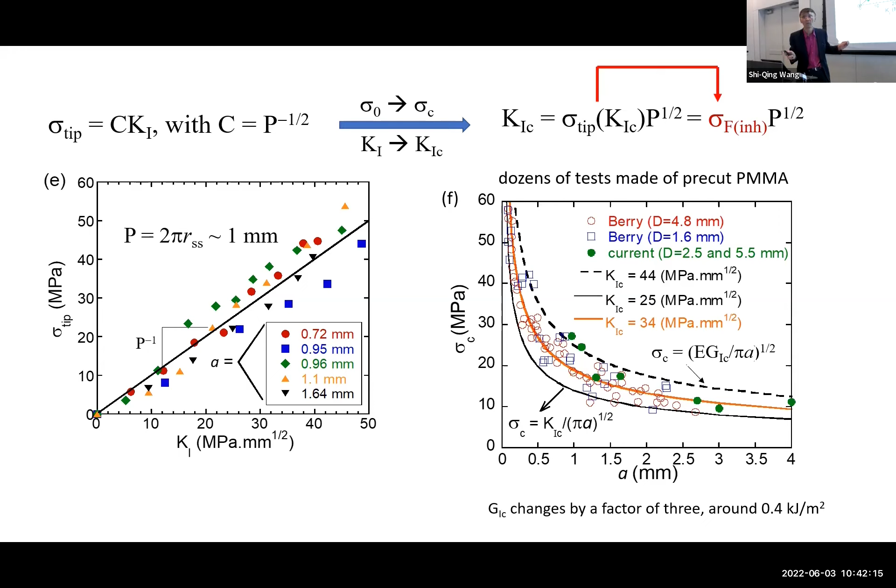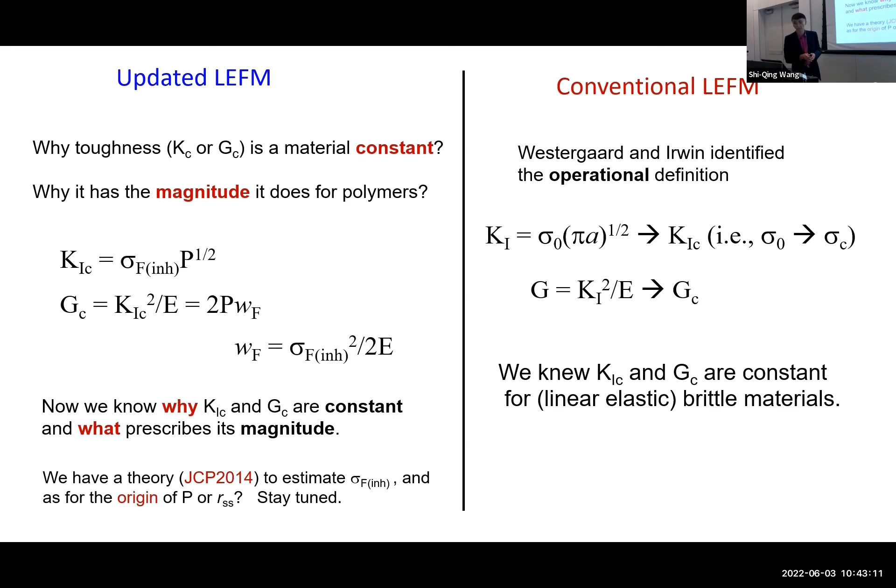Similarly, because of this relationship, you can get Gc. What's new is that it's actually related to the inherent strength and the characteristic parameter. If you plug this in, you find it again involves this—now it's linear because they are squared. It involves a length scale and the work density of fracture. So we've answered both questions: why it's constant, and what the magnitude is.

I know I'm running out of time soon, so just relax. This is the second part on elastomers. We want to find out whether similar things occur.

With elastomers, the way we had it, it was very birefringent, so we use monochromatic light so there are plenty of orders to deal with. This is the tip—you use a sodium light, and the tips start to build one order after another. The setup is similar, except we use this. I was proposing before coming that we're going to use laser to do it too, because we're just looking at the last millimeter at the tip. So the scale, I didn't give you the scale, but roughly speaking a millimeter is probably something this big.

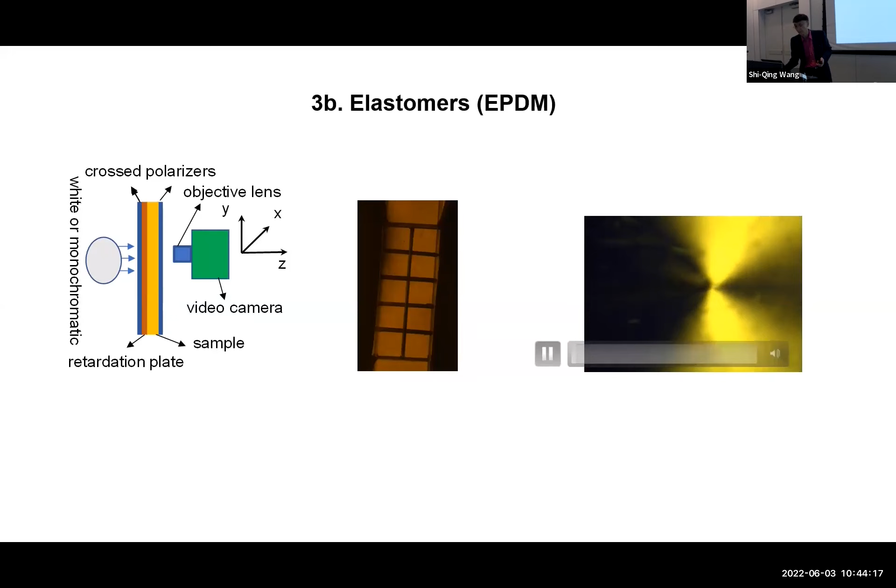Yeah, sorry, it doesn't speed up. You'll see some more. Here is basically carried through—do the same thing. The key point is the same. It's boring, right, just like plastics. The stress stops building—in other words, you see a big kink around a scale, it's just manageable, in the 50 to 100 micron range.

Again, this tip stress keeps building. You see, without this plateau, the last point is at infinity because it's inverse. Without this plateau, I wouldn't be able to confidently tell you what the tip stress is. So this is key—if this thing keeps going, then go ahead and resolve it, because it will go forever. That's the window glass case—you can never do this experiment, can never resolve below the wavelength of light.

So with this, we find again it's linear. That slope is 160 microns.

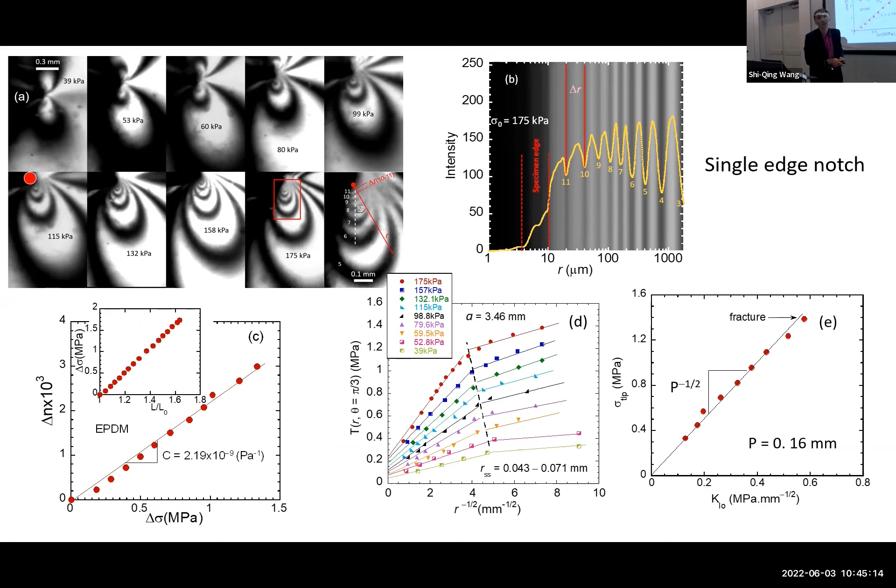So if I review it for you again: fracture mechanics told us for our polymers—okay, window glass definitely is flaw-intolerant, it cannot tolerate flaws. But does this really work for our polymers? Well, the framework of linear elastic fracture mechanics is to say: give me an uncut sample. The way I understand the fracture strength is because there are flaws.

Period. How do I estimate this? I better get Gc. How do I get Gc? I use a cut. If you go to pillar two, you meet the trouble that Irwin was trying to persuade us to think about, because this thing will diverge, and he just says, oh, there must be a messy zone—so-called a damage zone, there are many words for it. So there's something going on that somehow stops the singularity from going to infinity. Then the rest I can close my eyes to, because this just keeps building, it saturates to this level, and there's a magic point—boom, fracture occurs, and then we go to Gc.

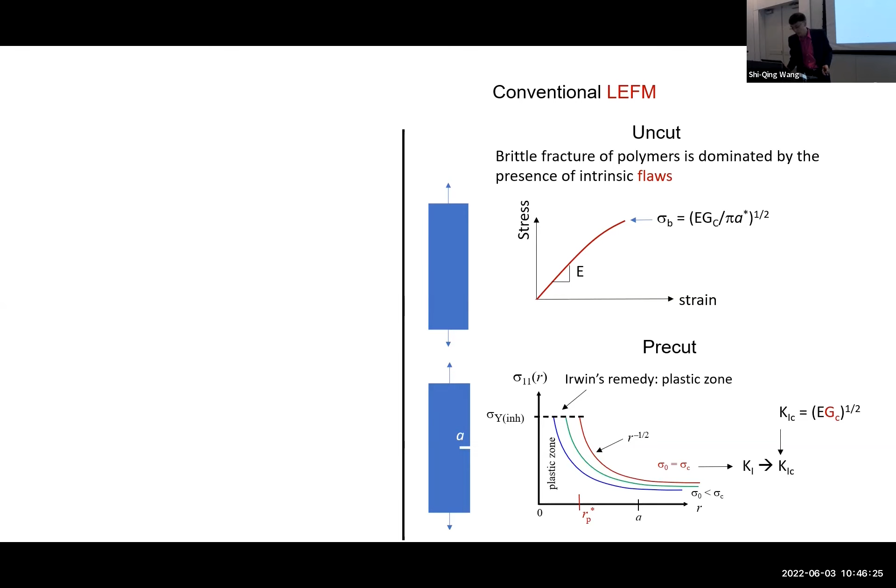Once we get Gc, then of course we go back to the energy argument. For polymers, our conclusion is pretty clear: when you have no cut, the strength merely, roughly speaking, reveals the inherent strength. Fracture mechanics is not in the business, per se, at 50 microns, 100 microns. So you just need your sample to be clean, not to have flaws of a millimeter, which we don't.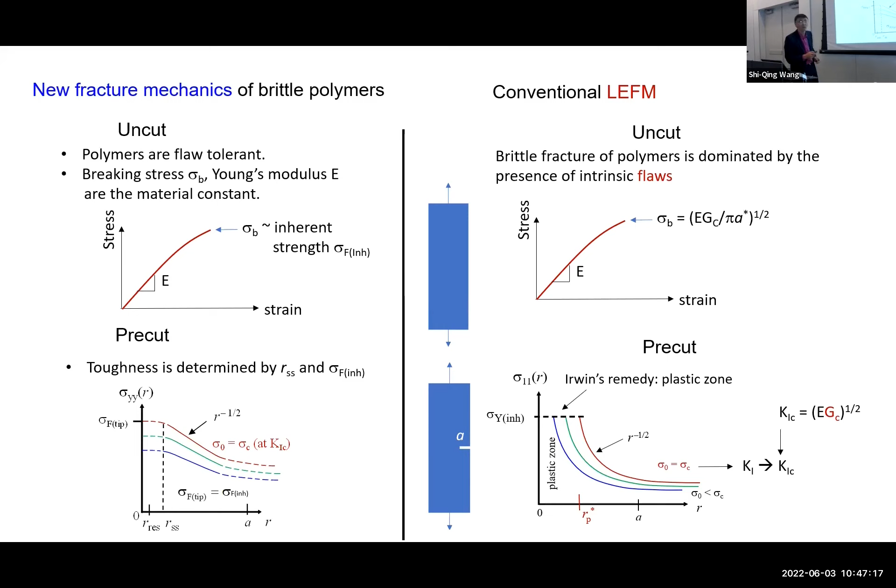Pre-cut, the scenario is so different. The tip stress builds up, not this other scenario. But I want to remind you, if you're not able to resolve it, if your maximum resolution is here, you won't be able to differentiate this result from that result. So the existence of the saturation that's resolvable is key.

I won't go through too much with you. There's another scenario, I showed you a single cut. There's another one called pure shear. This actually was the one driving me crazy, because it was so cleverly derived as a protocol.

Basically, it says GC should be given by the work density times H. If my H is bigger, I have a bigger sample. So my work density only needs to be lower because this left side is constant. I was so mad with this result because it's truly a beautiful way to state the energy argument.

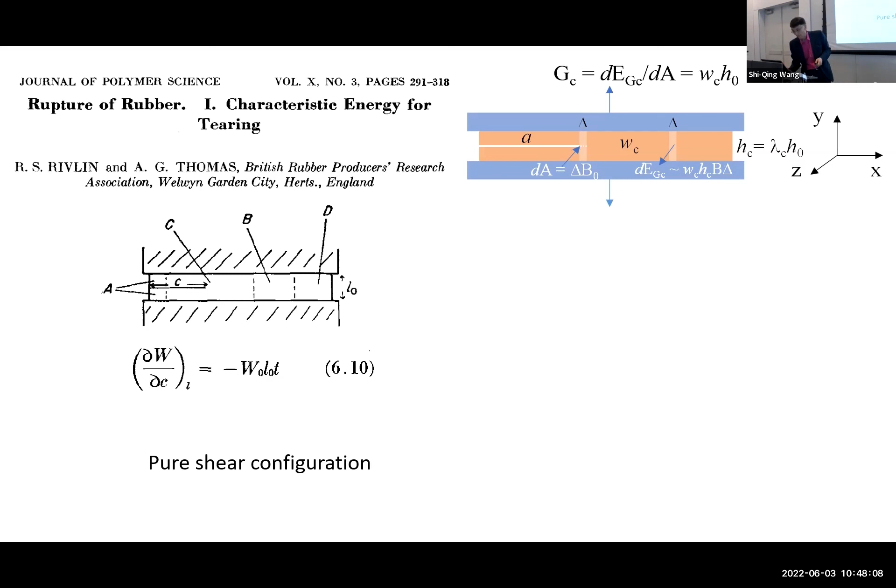What happens if I show you the next slide? So basically this is what happens: you prepare a sample that's taller versus shorter, okay? And what was said was that...

The taller one will break much earlier because we have so much more volume to store the energy, right? And I was so mad with this result, with this argument.

But look at what happened. At the same load, the taller one simply has much more intensified stress at the tip. You follow me, you guys?

Of course, then it breaks early because - I think maybe it takes more than a minute for you to absorb, but that's what happens. So these are different heights. At the same load, the taller one intensifies, having much more stress at the tip than the shorter one.

So it turns out this H magically comes into the tip stress such that the product has no stress-H dependence anymore for GC. I'm running a little fast, but believe me, the end story is this load parameter becomes a function of the height, because that's the only length scale left. The cut is so large, the width is so large, the only length scale is the height.

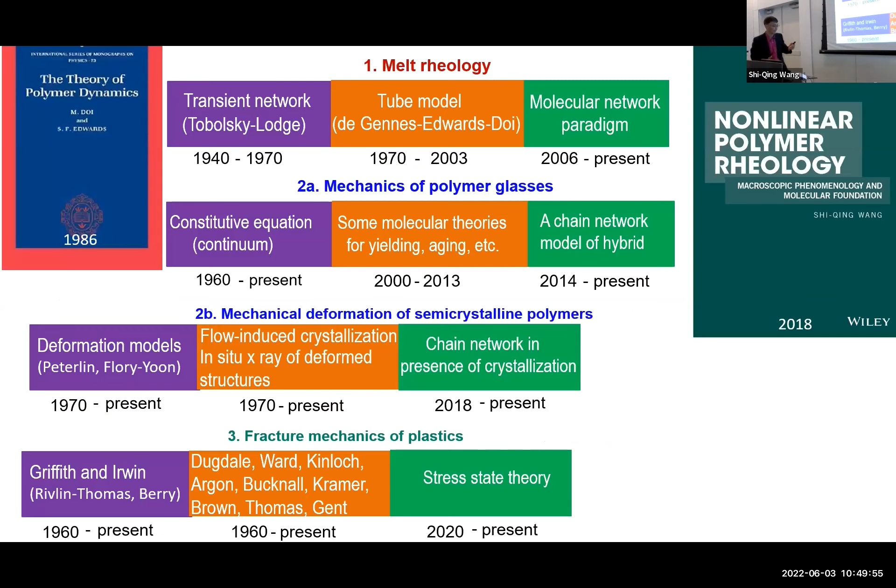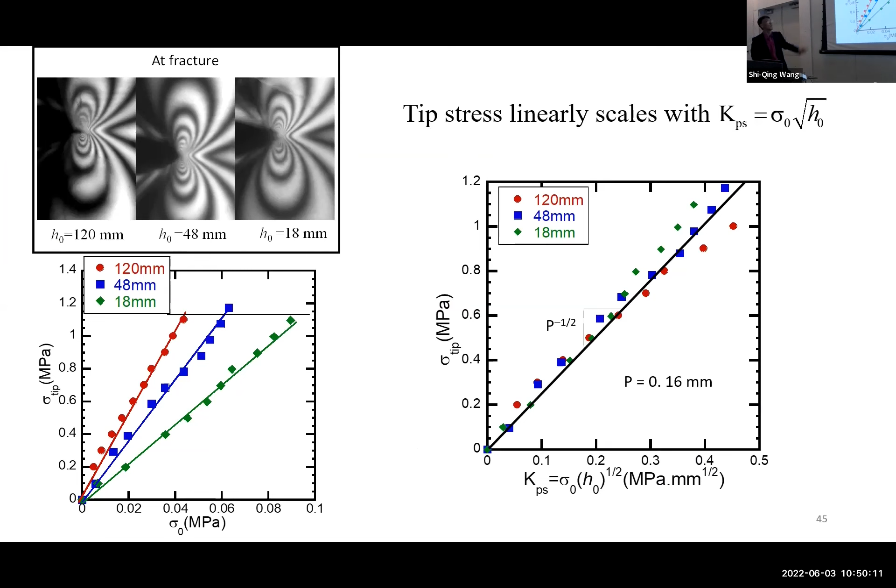That's the happy news of it: it breaks at the same tip stress, at the same intensity of stress, involving different load levels, and you can collapse the data and so on and so forth. I'm done, so I think I managed my time relatively okay.

So yeah, this is the whole summary, summarizing all three episodes. It's quite a journey. The first episode talked about something really shocking - I was somehow known as the shear banding guy, but we moved on. This shear banding was indeed very important. It told us that even in the liquid state, the structure can break apart, and not only break apart, but break apart inhomogeneously.

And then the glassy problem is really a difficult one, because the Eyring idea doesn't work. Eyring says give me stress and the barrier will always be lowered. If you follow that argument, your polymer will never be brittle - you can always yield. So it turns out the structure is what gives you the stress so that you can yield. If your structure, which is the chain network, breaks apart, then you cannot yield. That's my theory for the brittle-ductile problem.

And this is, of course, a beautiful example showing the processing-structure-property relationship. And lately we found, since you're talking about breaking, we'd better just have an intentional cut and find out the physics of breaking. In particular, answer the question of when you have no cut, whether the breaking has anything to do with the business of fracture mechanics - in other words, whether your material is flaw intolerant or tolerant.